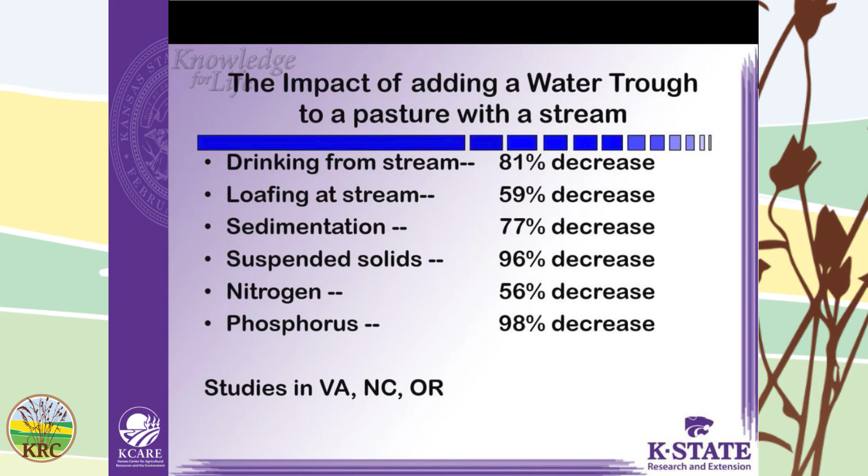Look at that, 80% of the drinking, the loafing is 60% gone. It gets rid of more than half the nitrogen, nearly all the phosphorus disappears because we don't get poop.

So what have you guys been doing the last month? Did you guys see any of this in the last month? How many of you guys are farmers who got cows? Yeah. Ed, you may have seen some of this, people looking for holes in the creek or openings of the creek, or even some of them were chopping ice. And that is not a fun process.

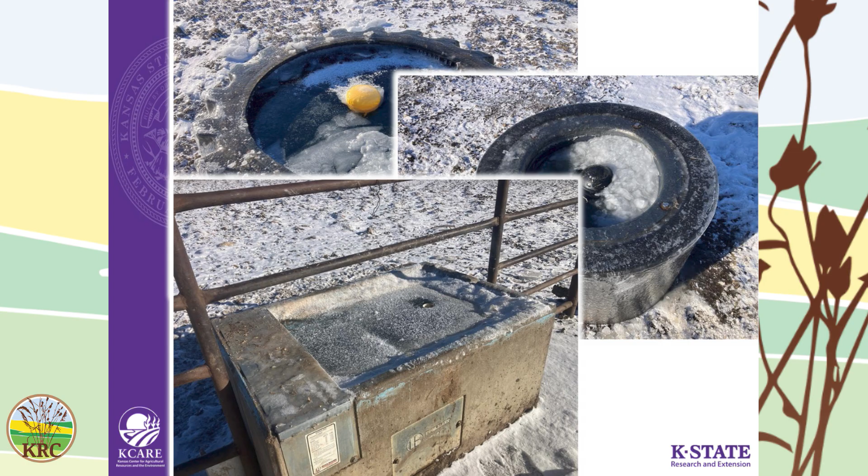I was actually using tanks like these to keep cattle away from the creeks. That's a Cobet, the other one's a tire water. Now this is a Bowman tank, and I'll talk about them a little bit different, and how we keep some of them open in the wintertime.

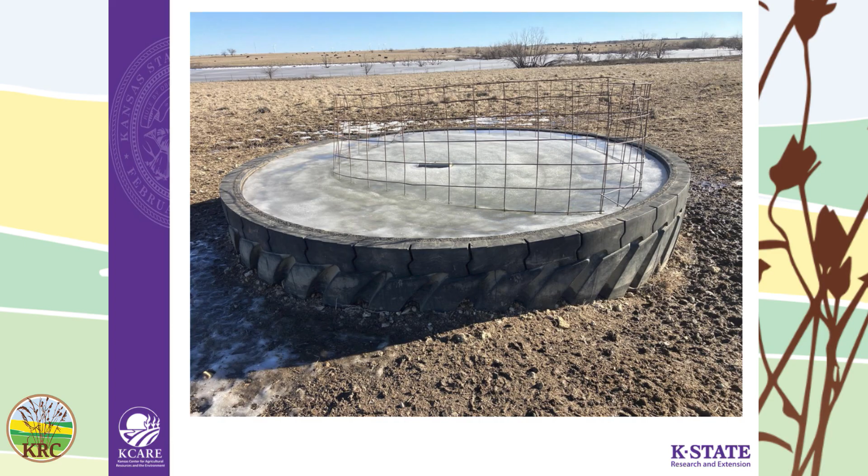But anyway, you've heard people talk about these big tire tanks, giant tire tanks. How would you like to walk up to that every day in the winter? That's a nightmare. You don't do it. I had a guy that put in about 15 of those. I helped him on most of them. And his employees about shot him after the first winter. And so we actually put a small tire tank off to the side and let the big ones just freeze up in the winter. Or they froze, but not nearly as bad.

Okay. But anyway, this handbook has got an awful lot, I know it's small type and small writing there, but you've got a copy on your phone. This is the table of contents on it, and it's got lots of things in it. And most of it is organized by the source of water. Now, there's some information in there on pipes and how we do different things, pumps, solar pump, and things like that. And we'll talk about all those before we get in.

The way prices are now, we couldn't put a price on things. We just put more dollar signs on those things that are more expensive. And that's how we address some of that. And that's in there. But drilled wells, my God, those people that have drilled wells are lucky.

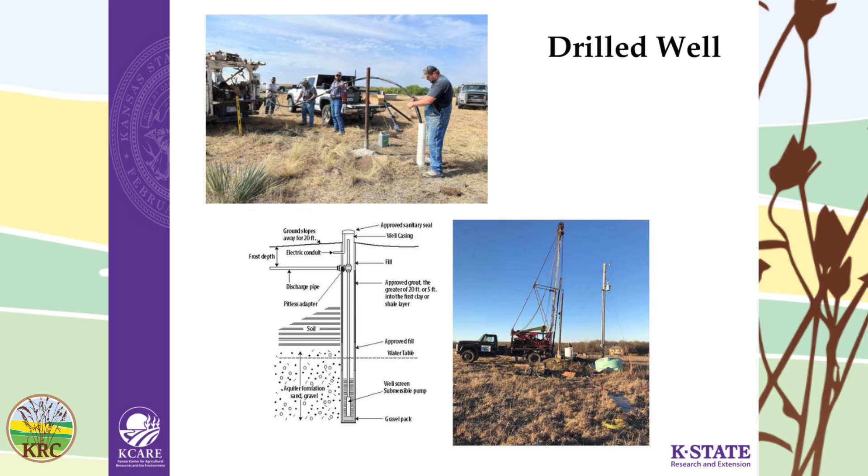In eastern Kansas, we don't have good drilled wells. You've got reliable water supplies. It's clean. In the wintertime, it's warm. And you can pump that water up and actually melt the ice in the top of your tank. I mean, it's that kind of stuff.

And we talk about that and some of the advantages and some of the disadvantages, you know, no evaporation, things like that. Disadvantages, sometimes they don't do very well in the long droughts. Some of them go dry on you in the drought. But we talk about the advantages and disadvantages of them, how to put them in. We were talking about pitless adapter.

Pitless adapter is a piece that goes in the sidewall. Soil level would be up here. But a pitless adapter comes in right there. That's so that you can pull the pump out of the well without having to break the pipe. It's a $35 connection, but it works well.

We talk about lots of different pumps in there, everything from AC pumps. You guys that have wells and AC pumps are even in better shape because you can have water whenever you want. It'll even pump at night. You can use those small Ritchie waterers and things like that. Cattle come drink at 7 o'clock in the evening.

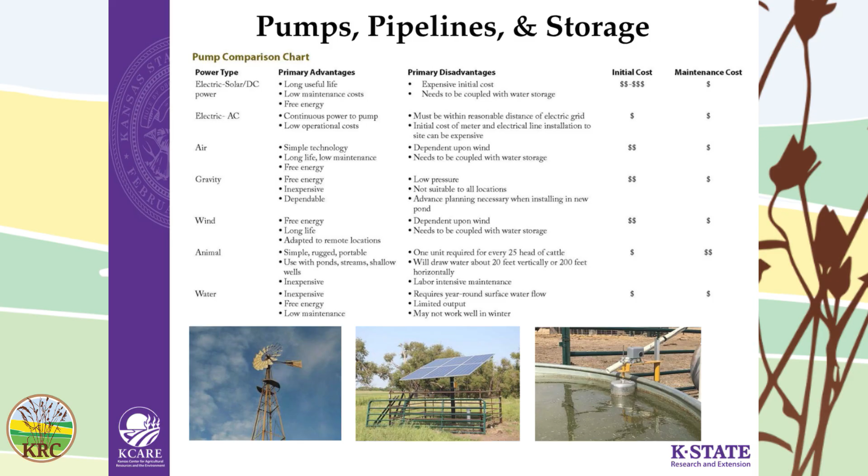It refills, no problem. Those that have solar pumps, what do you think? They can't use one of those because if they drink in it, it'll be dry until 9 o'clock in the morning. Well, maybe not even then because it may not be sunshiny at 9 o'clock in the morning. But anyway, windmills. My favorite is gravity flow from ponds and things like that.

That's where I spent a lot of my time. I'm in eastern Kansas. We've got more ponds and not wells. And so I spend a lot of my time working with gravity flow systems. So those people that have electric pumps, they'll be pumping 40, 50, 60 pounds of pressure. Our gravity flow systems are down to 2 pounds of pressure. But you use bigger pipe and it works just as well. We'll talk about all those.

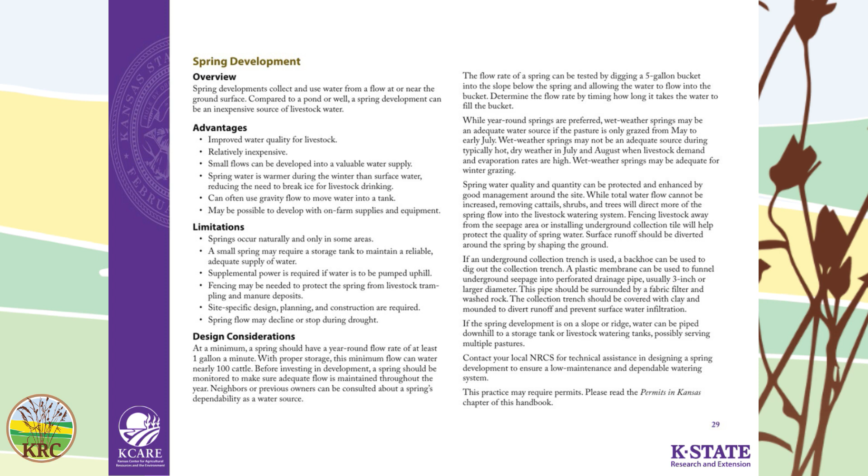Spring developments is another thing. We don't have many springs in Kansas. I mean, eastern Kansas, but in the Flint Hills, there's a number of springs. And we talk about developing a spring. And it's a process of, you know, there's a wet spot up here on the hill, and we actually collect the water from up in that wet spot, pipe it down to a tank.

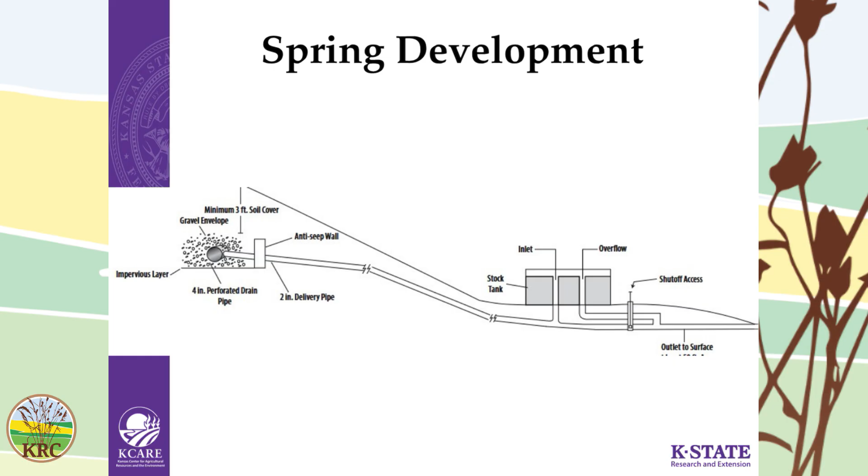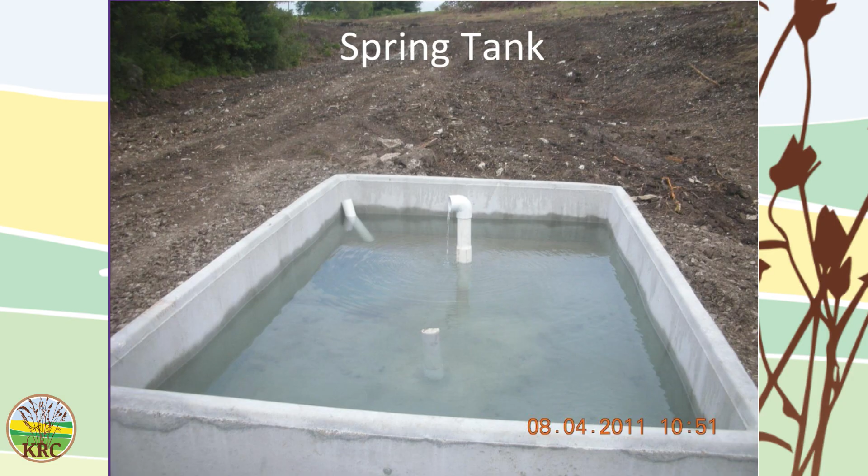The other thing, here again, they're warm sources of water, and a spring, if it's truly a spring, it's just gonna flow a gallon a minute, 2 gallons a minute, whatever, 5 gallons a minute into the tank, and then we catch the overflow and run it back and put it in the stream where it would normally go.

I mean, that's most beautiful. The whole tank will be free of ice, even on a 0 day. Spring development, but you gotta have a spring. Source of water is the key to it. I deal with an awful lot of ponds. And the problem is getting water out of these ponds.

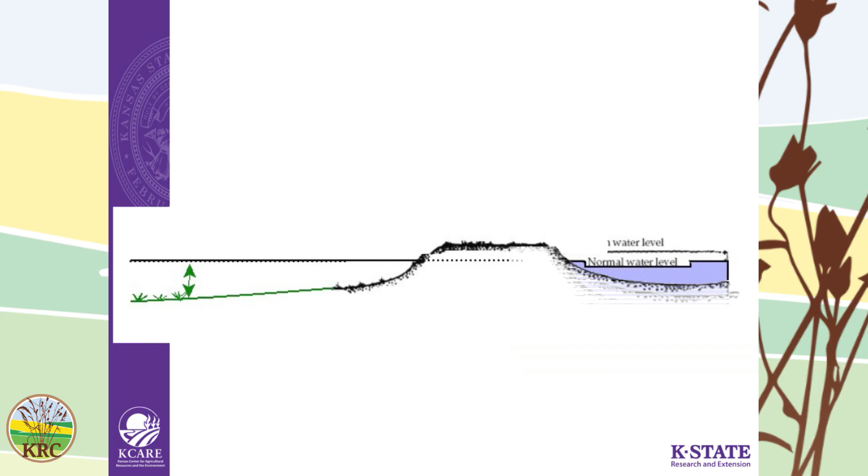And so one of the things that I've worked with was helping guys put lines through ponds. And part of the reason that I've got an hour is hopefully I can get through this part and we can show you some videos of doing some of these things. I hope to show you that as we get to the end.

And what we actually do is we get this line in, and we can't put it way down here because it'd be too deep, but we can put a line through a pond that is full of water and not lose more than 100 gallons of water. And we can do it. We've done it many and many a time.

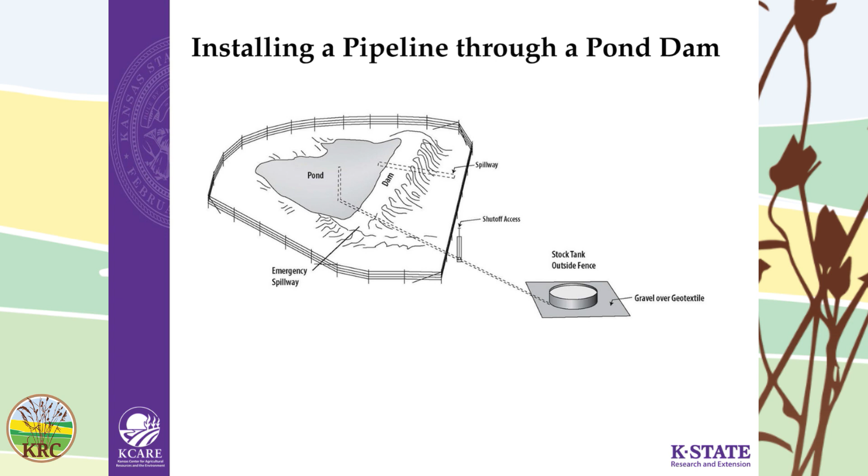I get leery of saying, I'll come help you. The situation is you got to have good clay soils or I won't do it, because you have to be able to seal that pond back up. But we can do it. And what we're trying to do is get the line back here to where we can put a valve so we can shut that line off and bring it back here to where we can put our tire tank or our behind the pond tanks of whatever nature we use back there. And we'll work on that.

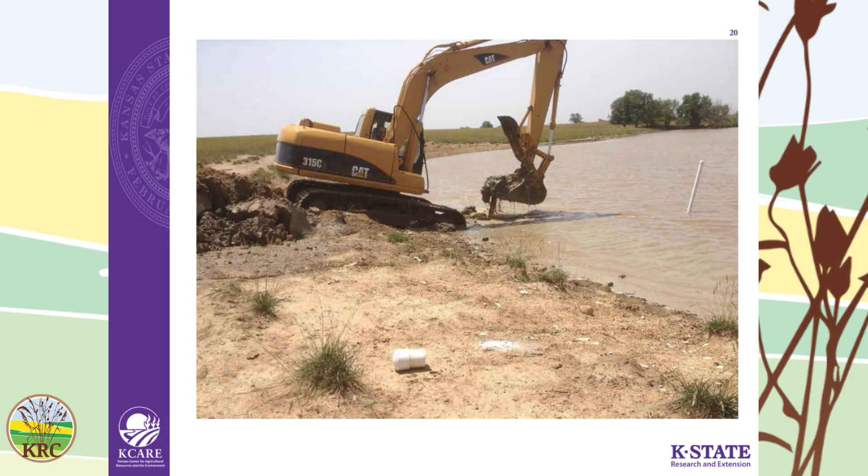There's how we actually put that line through a pond. We actually do it with an excavator. Some of them have 2-foot buckets. Some of them have 3-foot wide buckets. Oh, it scares you to take a 3-foot wide bucket to the pond dam. But we do it. The actual instructions are in that book. They're actually there, I think.

Do you have that handout? Huh? We got that handout. And yeah, most of you got the handout. If you haven't, it's one of the handouts that's in there. The instructions I wrote on that. It's deep out there.

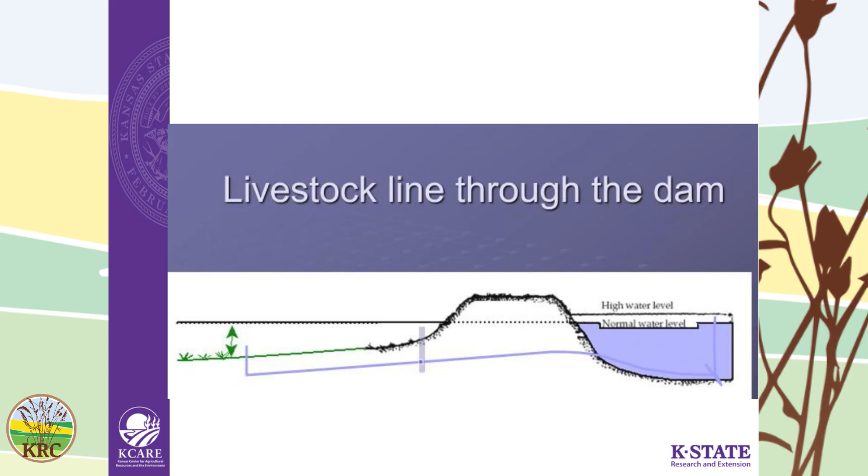The other thing is you got to do some shooting elevations. Got to make sure you got enough elevation to fall to get that 2 pounds of pressure I was talking about. So you actually shoot the spillway, the primary spillway. I shot what the current depth was. And then you shoot the elevation where the tank is going to be. And I want 6 foot of elevation difference. And that will give me over 2 pounds of pressure.

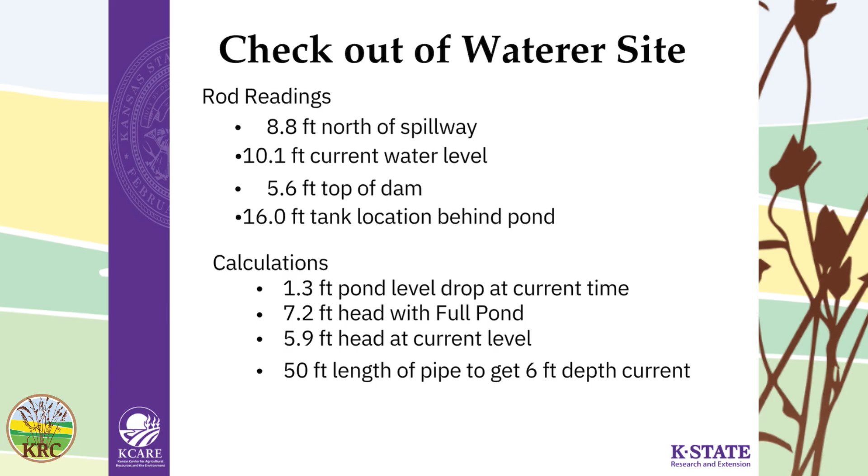1 pound of pressure will push water 2.3 feet. So, look at that. What did I say? It's got 6 right here. Currently, it's down 1.3 foot, but it's still got 5.9. So we were happy about it. And in fact, the video that we show was actually in this pond.

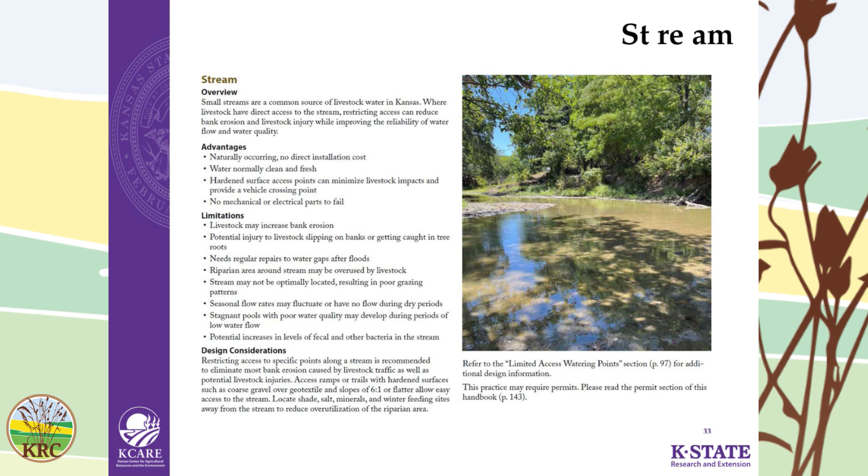Streams is another thing. We'll come back to ponds and we'll look at that a little bit later. Let me get through these. How do you get water out of a stream? How do you water cattle from a stream without just letting them have full access to it? Huh? Fence off a little bit. Okay, and I'm sorry, I found this was from, I can't remember, North Dakota. And we have done them with gravelled area, made lanes across, just like a truck crossing, and just fence it off and just give them access to that little bit.

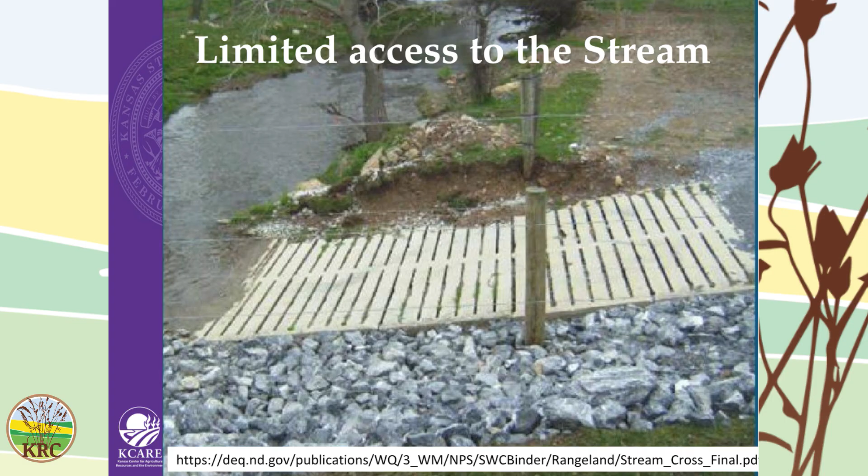You know what these are? Hog slats. Hog barn slats. If I ever do it again, I am gonna go find me some old hog barn slats. I like the looks of that because keeping those crossings solid is a problem. When you put that in, you do not raise or change the bottom of the stream bed. If you change the bottom of the stream bed, you got to get 404 permits and things of that nature. Just maintain the same bottom of the stream bed, and you can do it on your own. The state doesn't care.

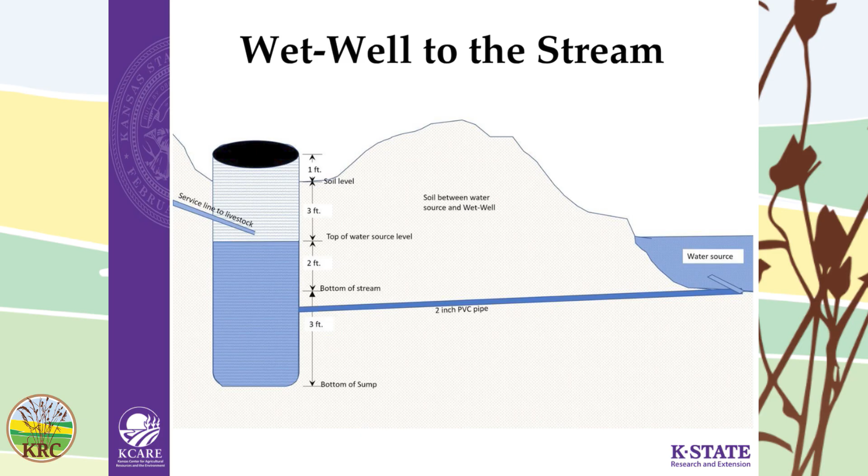Another thing you can do is put in a wet well. A wet well is a version of putting in a culvert or some well over to the side of the stream, and then we connect it with a pipe or a gravel core. It can be gravel either way, so that we bring the water over there, and then we can put our pump in here, a solar pump or whatever kind of a pump, with a pitless adapter, so we can get our pump in and out of it without having to go in the creek.

If you get a flood, the creek would mess up your pump, even if you pump directly in the creek. In this, you got a lid on it. The water will go across it. Your pump will still be down in the water and be fine. But that's a wet well. And I'll actually show you some pictures of that going in if we get time.

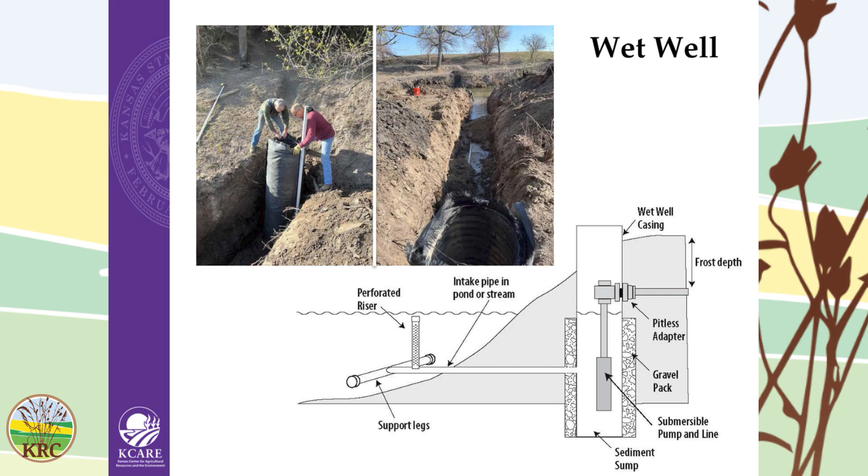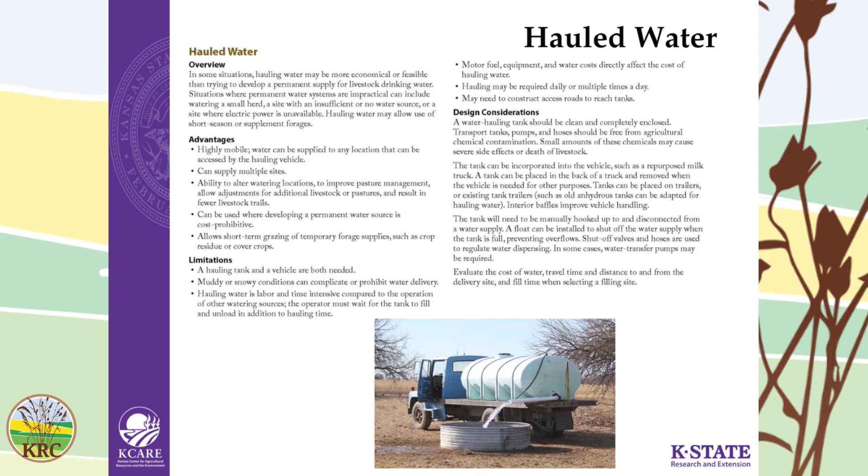Hauling water, that's got to be the most expensive process. Have you ever seen someone hauling water that had a good truck? If you haul water with that truck, it will not be a good truck very long, because water is so heavy and we overload it with the water and things. But if you think about using good equipment, that guy is just filling the tank and gonna go on or come back and do it however often.

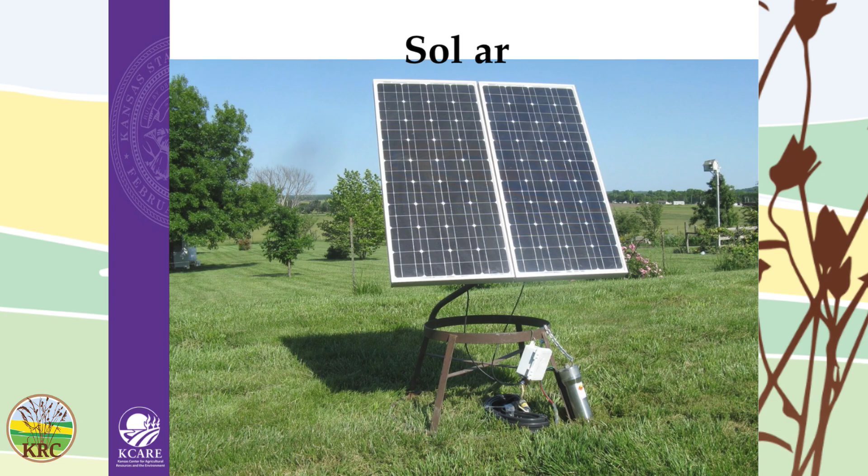Solar. How many use solar? Solar's good power. I like solar. In fact, we pump from ponds with solar more than we pump from wells in eastern Kansas because we don't have wells. But solar works very well. But this was one of the original demonstrators I used. Notice what it's setting on? Old salt trough. Yeah, it's a mineral feeder. Old mineral feeder, you know. And I drug that around in my state truck a lot of years and a lot of places because I could go throw that on an asphalt driveway, set it on top, off we go.

Oh, here, let me go back here. I thought I had a picture of the pump and a picture of the controller. And in your handouts under solar, it's this system, and that's all priced in there. Over the past 15 years, the package hasn't changed. Pumps have gotten more expensive. They're twice as expensive as they were when I started. But solar panels have come down, and the solar panels cost $5 a watt when I started. Now you get them for less than $1.

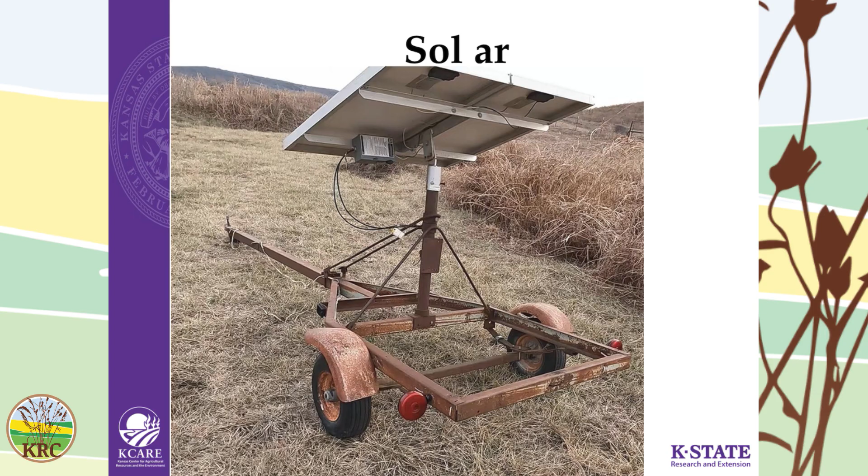NRCS says we need to have 3 days worth of water. And I feel the same. You got to have 3 days worth of water. Now you can have it in the form of a battery if you want, but you got to have 3 days worth of water. You can have it all in one big tank. One of those 15-foot tanks will hold 1,500 gallons.

1,500 gallon, but you know, if you only have 30 head of cattle, that lasts a couple. Okay, but that's what that's about. Simple patterns of how the pump and everything goes together.

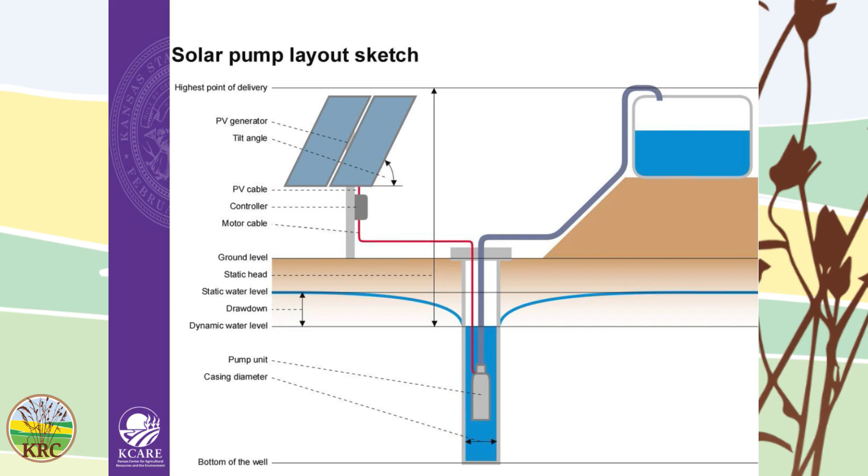You were talking about your pump system. It pumps up and goes directly to the tank, has a valve up there and shuts it off. People put a weep hole in this so that the water drains back below ground, below freezing level during the wintertime. And so when it needs water, it pumps water and doesn't freeze up. And it works well.

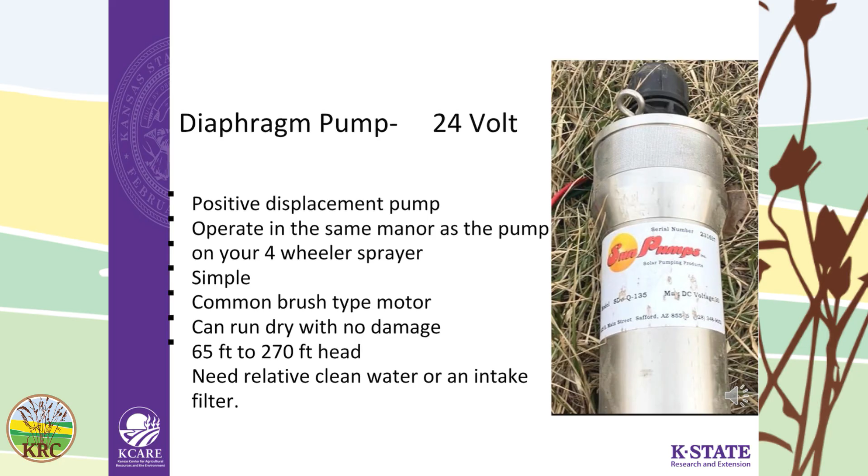There's a diaphragm. Here is a solar pump, a diaphragm pump. That one will cost you $900. My sun pump. It'll pump 3 gallons a minute, maybe a little bit more. This one you buy on the internet, $450. It'll only pump 2 gallons. Let me see here. Here, 2 gallons.

And you say, God, are these gonna last? I tell you, it costs $150. If you don't trust it, get another one. Buy your replacement. Have it right there for you, because that way you've got a pump. They performed okay. They really have. I know one guy that claims he burned one out, but it works well.

That one will push 270 feet tall. That one will push about 100. So, but most wells are more than 100 feet deep. There it is. Some are 12 volt, some are 24 volt. The 12 volt are great because they can use a battery to pump on those cloudy days.

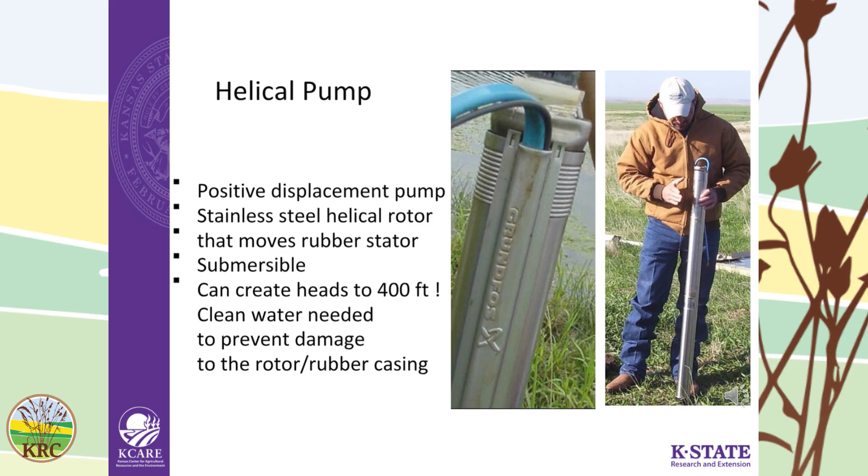Here's probably the most fancy pump. It's a helical pump. It'll push water out 400 feet, and it'll push 7 gallons a minute, 400 feet. The good thing about this is that you can unhook it from the solar panels, connect it up to 110, and it doesn't care. It's got all the smarts in here somewhere.

I say in there somewhere because it is welded. The motor is welded shut and you don't get in it. But it's one of the best. And it'll run you probably $1,500 just to buy it.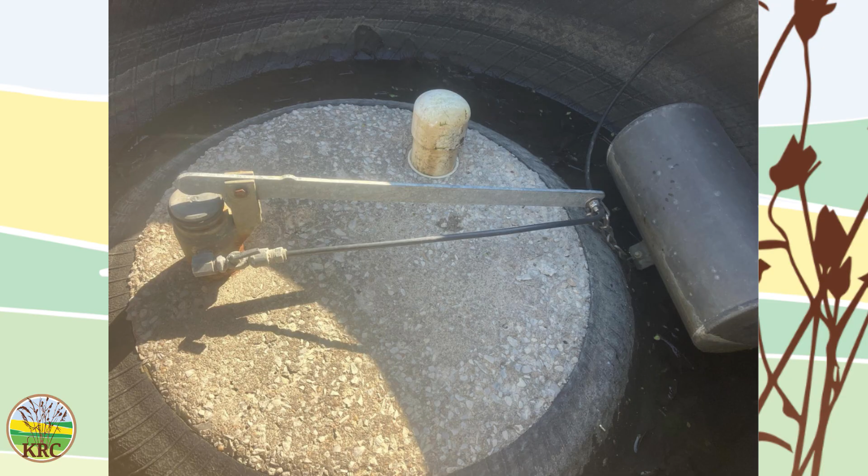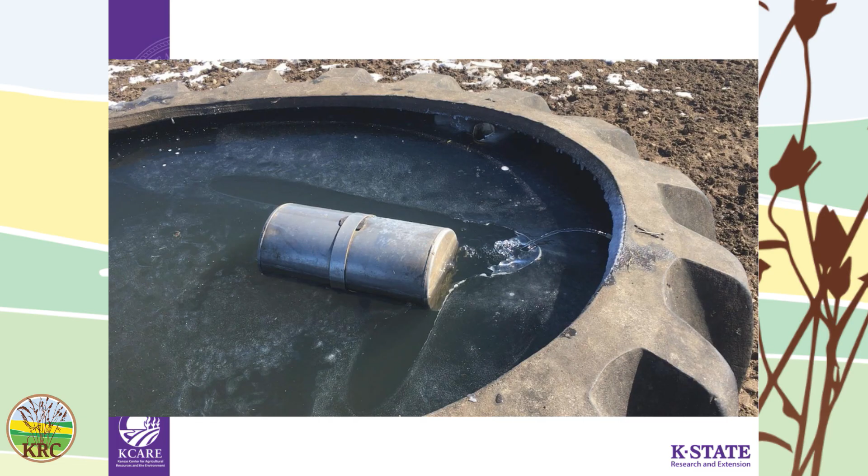For gravity flow systems, we actually use 1.5-inch pipe coming through the concrete. You see that right there. It's a 1.5-inch pipe coming through with the valve sitting on top of it, okay? And it's got to be that way to get us good flow for a small tank. You got to be able to refill it faster because you can't have a 1 gallon a minute or 2 gallon a minute flow with a small tank. Now, if you had a 13-foot tank, you can get by with a slow fill.

But anyway, the other pipe in there is a drain pipe. That's so that we can pull the plug on it and drain it. That's just a cap on a piece of pipe. And so we can pull that out.

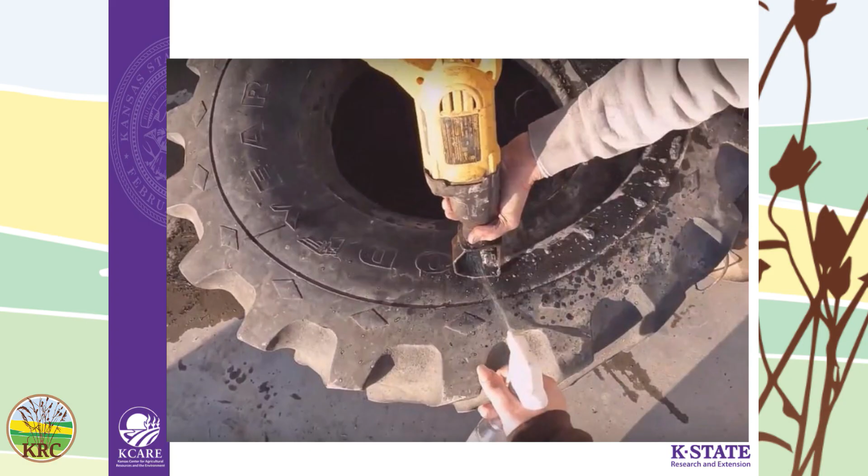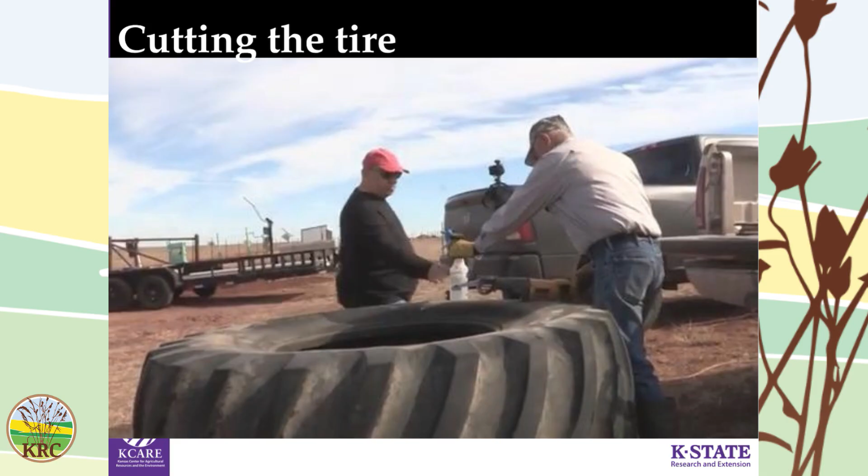One of the things that people get worried about is how are you gonna cut the tire? I mean, my wife can even tell you how to cut the tire, right? Skilled labor, huh? Unskilled labor. Put a little Dawn water in here, similar to what you use to check a tire for leaks or something like that. Doesn't take lots, a little Dawn water. And you spray that directly on, well, here.

Oh. We'll get to that video a little later, I guess. Come on back here. Let me get back here. Got too many things I want to show you at the same time.

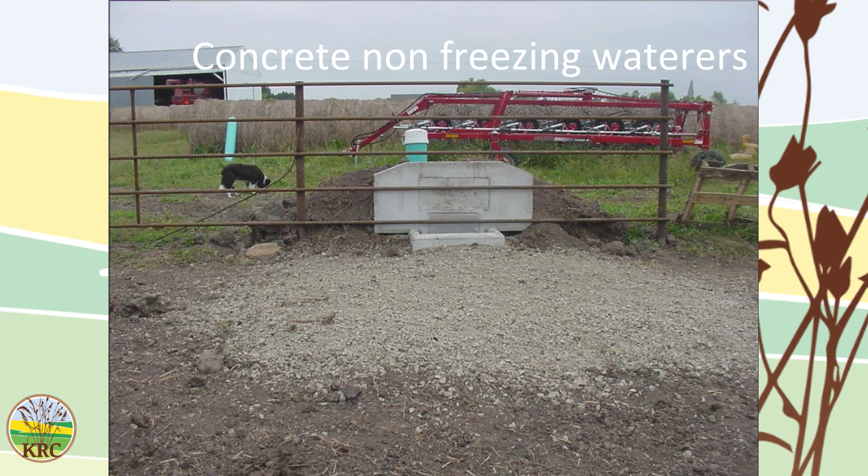There's one, you see it. But all this back here, there'd be about 4 foot back there. It's covered up. A lot of different kinds of these tanks. There, I had a demonstration with a number of them. There's a Cobett back there. Some of you guys have seen Cobett waterers. They're those round ones. I think I'll show you a picture later.

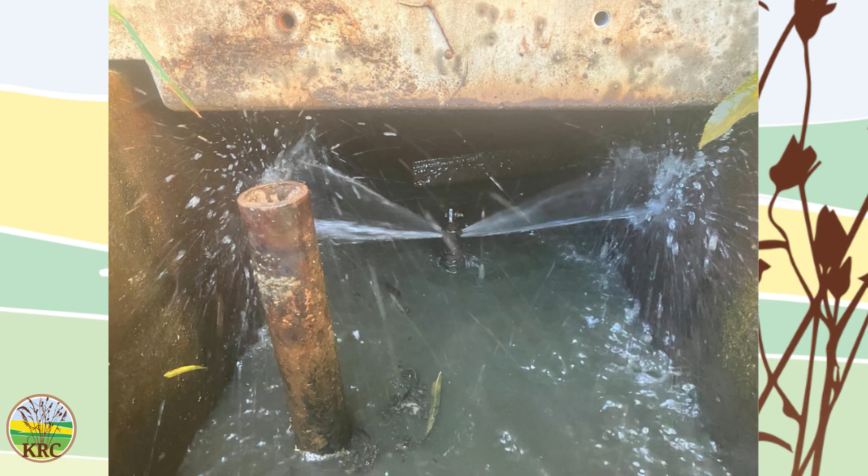These behind the pond ones, I have it emptied down so that you could see the water flowing into them. And that's gravity flow. Got to have water coming in there pretty good though. That guy actually siphoned over the top of his pond instead of going through it. The trick is to siphon. A siphon will always break at the most inopportune time. So you got to know how to restart your siphon.

What we use for him is a sump pump. Set the sump pump in the tank. Got to have some water in it. Had a connection to this pipe here. Pump backwards through it. Push the air out of the back into the pond. And you're ready to go again.

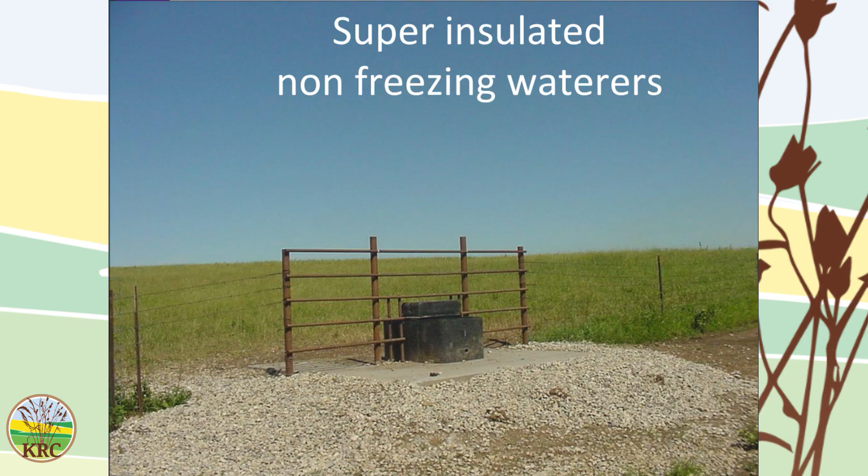The other thing is these super insulated tanks. I talked about Ritchie and Mirafount and Pride of the Farm, Polar Max. All these guys have good tanks. They're insulated, super insulated, but they require 2 to 3 days worth of volume. I mean, 2 to 3 fills worth a day of consumption. If you don't drink from those, they'll freeze up just like an ice chest. Now, it may take 2 or 3 days for that, but when it freezes up, you've got to melt it, and it'll break the sides out of it.

How are we doing on time? Got about 20 minutes. Okay, cool.

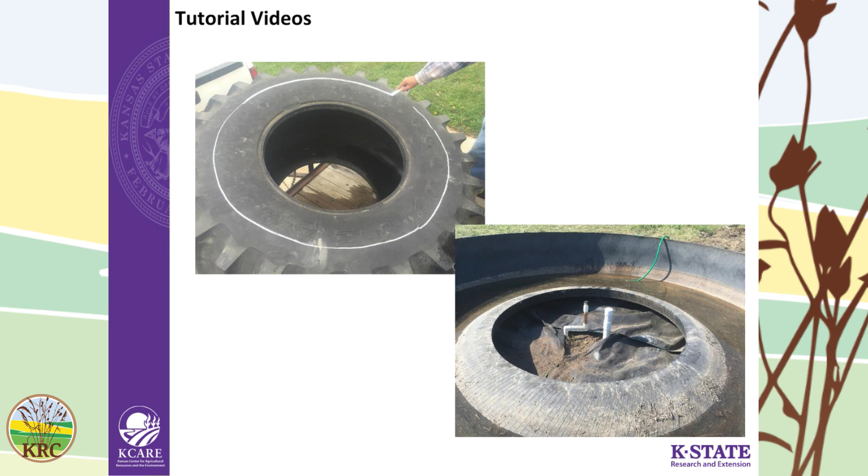If you have any questions about stuff, because part of the grant was to write the book. But the different part of the grant was they wanted me to make some videos. And so we made some videos, and I'm going to show you some of them. And you guys can look at these just as well. There's some of the videos we made. That's all on tire tanks. One on winter water, one on wet wells, hardened surfaces, that's that rocky area around the tank, and things like installing a line through a pond. They're all out there.

Go to K-State KCARE. You've got to get inside YouTube and search for K-State KCARE. Okay. And when you get there, you'll find there's quite a few videos out there. But our livestock, like here's the one on winter watering, there's a wet well one, there's one on tire tank parts and things of that nature. There's one on cutting the tire, Carol. But here again, let me show you.

Is that, you hear good enough?

But anyway, that's just cutting it. Let me go on and talk about the video about getting the bottom tank ready. I put the drain in. I'll get part of it putting the drain in, but we do have to be careful. We want all the plumbing so that it ends up being level with the top of the concrete.

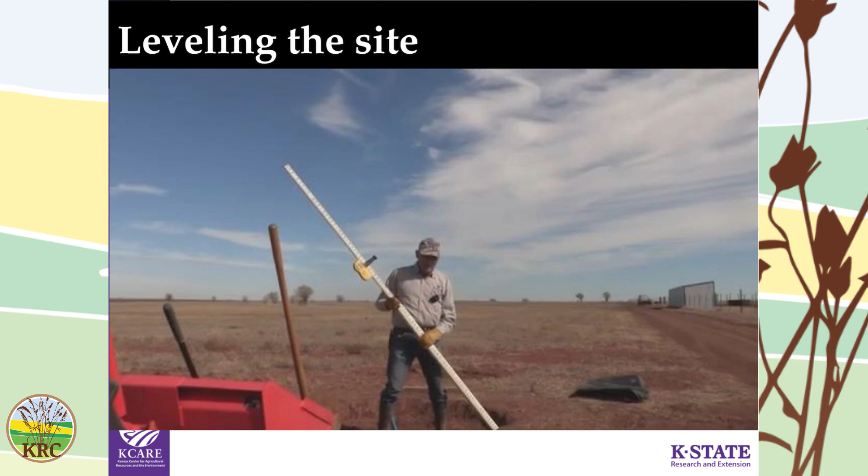Well, we want the threads to all be close to the concrete. And that's about all. If you've got all the threads above the concrete, you're in good shape. The concrete will fill right to that level, and that plug, you set it because you'll pull it to that coupler that's in the concrete.

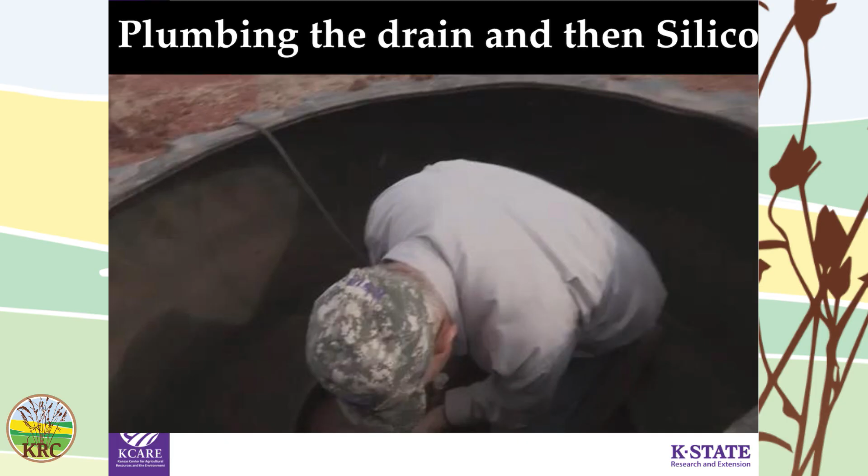We mix fiber in our concrete. You've heard of fiber concrete. Construction people make the same thing, but I get a bag of fiber for $5 and it'll do 40 bags a sack. Fill that void down underneath that.

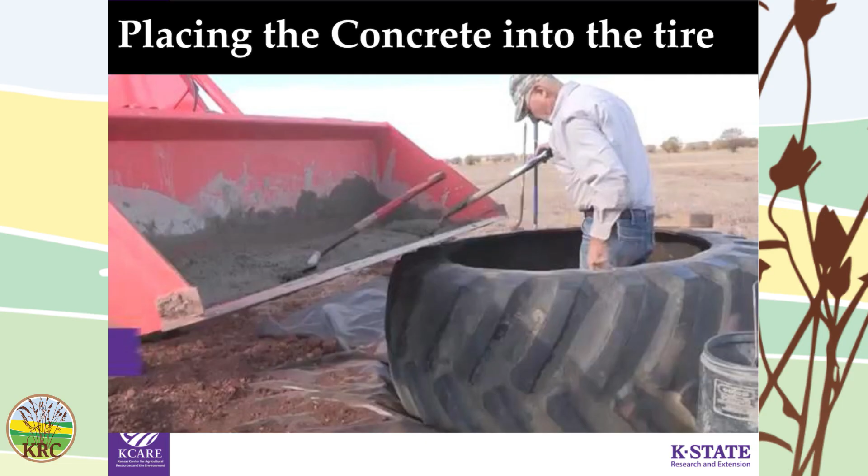And we actually make a little more concrete to put on top. Do you put a? Yeah, I put. When I get ready to do it, I put a bead of silicone on the outside, on the bead side, and I put silicone around the pipes, right around this, and then I take my finger and I rub it to smear it around. It doesn't have to be a pretty shaped bead.

It has to be silicone around there because concrete doesn't stick to rubber. Not well, but that silicone sticks to rubber pretty good. And the concrete just smashes right into that. Can you imagine? It's got sand and gravel. So it's a good adhesion.

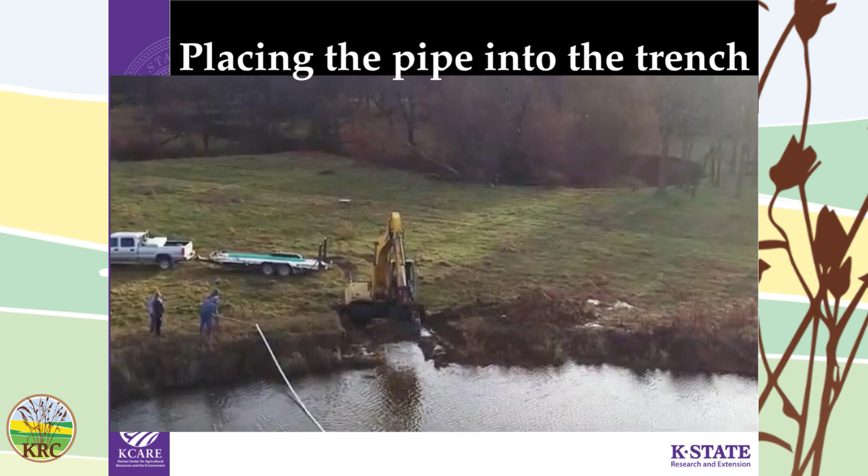He's building the coffer dam here, and projecting, huh? Yeah, behind the coffer dam, pumping that out because I crawled out in there. Oh, you'll see me in here. Now I'm there. We clean that out. Yep. And then I clean to make sure it's going downhill, not running uphill. I'll make that transition here.

You can watch me. I get to digging fast. You guys got to work to keep up with a 70-year-old man. 70?

But anyway, you get the idea how that goes. And then after we get that, he digs out and we lay the pipe in and fill it all up. So that first valve, is that just buried there? Yeah. Once we get everything else going, I turn it on and we walk away from it. Okay. It'll stay open. Oh, I could put a riser, but no, maybe I don't.

I thought I had a piece of gasket fit pipe, but instead of glue fit pipe, it's a gasket. And I used to use a plug and a piece of gasket fit pipe, and when we got ready to put it on, I would get in there and I'd work my plug loose, yank it out. Now I got water running right at my feet, and we stabbed the gasket pipe with the other end.

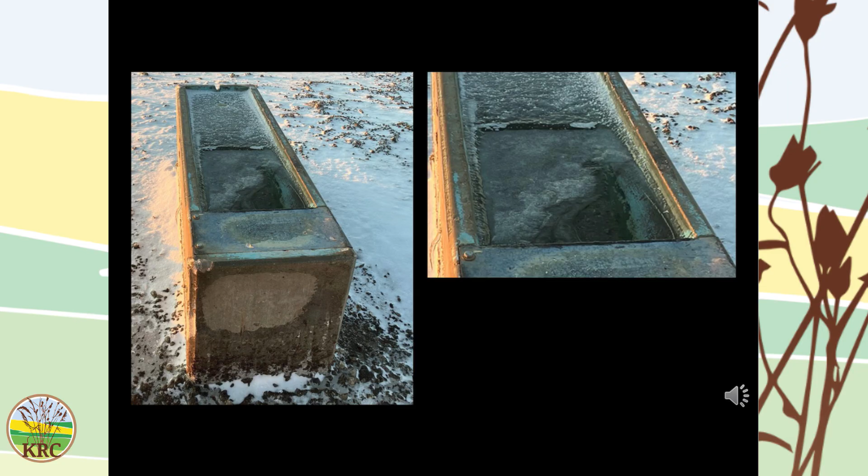Anyway, for some of those Bowman waters that have a large concrete area out here and got the valves back here at one end of it, concrete tanks or something like that, they freeze up terribly. And most of them use water, wasting water to keep the valve open. So we've tried lots of stuff, but we went to these bullseye nozzles. You see that little bitty fine stream? You can adjust that just like this. This is a hose-end spray. You go to the hardware store and you can buy a bullseye nozzle, hose-end spray.

Okay? And it'll shoot that little fine stream. Or you can turn it off. Like about a week ago on those tanks that we had been running, when it quit freezing, I shut mine off. All I had to do was reach up in and shut it off. Now, once in a while, these will go bad on you. You know what you do? You call the company and you tell them that it went bad and they'll send you a new liner. Now, you may have to pay for the postage. They'll send you a new liner.

I asked her for 15. She actually sent me 20. She made me send pictures. You've got 15 of those? Show me pictures. So I had pictures from all kinds of places. Like that picture, it got used, all kinds of things. But they'll send them to you, and yeah, it's a little mess to do it.